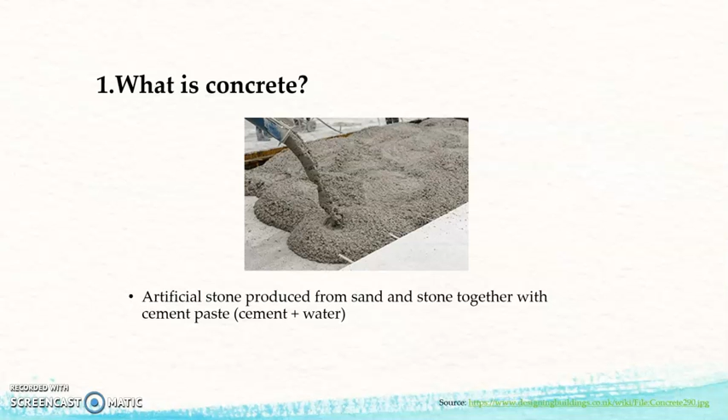First of all, what is concrete? Concrete is an artificial stone produced from sand and stone, together with cement paste, which is cement plus water. The cement paste fills the space between stone and sand particles, which then forms as the illustration on the slide. To explain in more detail, air, water, and cement form cement paste. With the addition of fine aggregate, which is sand, it then becomes mortar. Then, including the coarse aggregate, which is stone, and a little bit of admixture, it then becomes concrete.

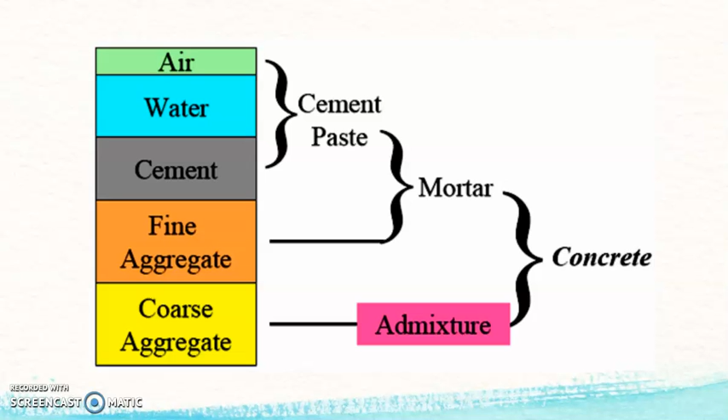These are the ingredients of modern concrete: binder materials, aggregates, water, admixtures and fiber. For the binder materials, it includes examples such as Portland cements and cement plus supplementary cementitious materials, SCM. For the aggregates, it includes both the fine and coarse aggregates. Particles below 5 mm in diameter are classified as fine aggregates. Particles larger than 5 mm in diameter are coarse aggregates.

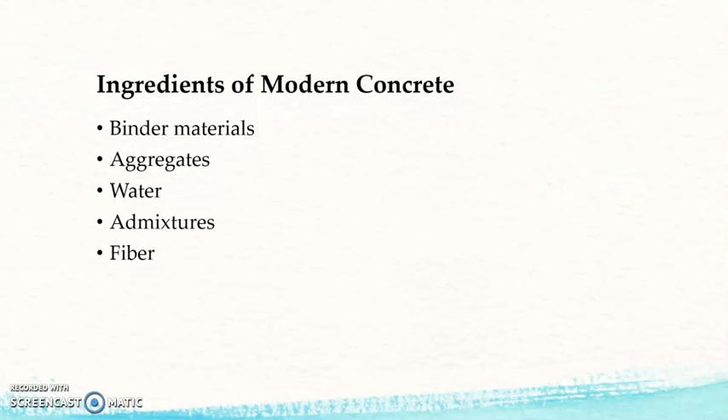Moving to the concrete applications. These are just some of the examples of concrete in our daily lives. Concrete is really widely seen and widely used in our daily lives. It can be seen in residential and commercial buildings, bridges, flyovers, culverts, dams, tunnels, water tanks, even swimming pools. Also roads, runways, pipes. Moreover, foundations, piles, and sewers.

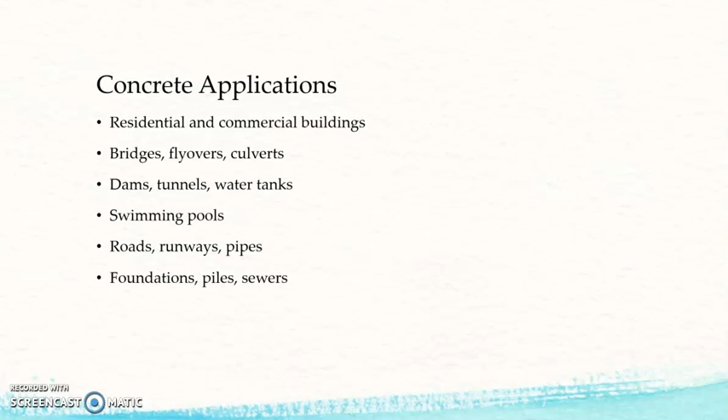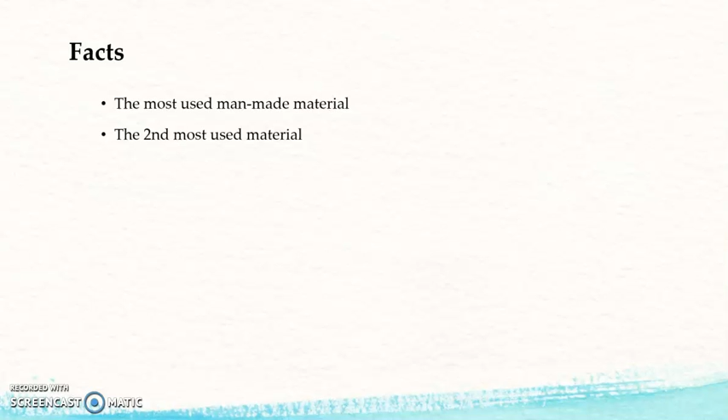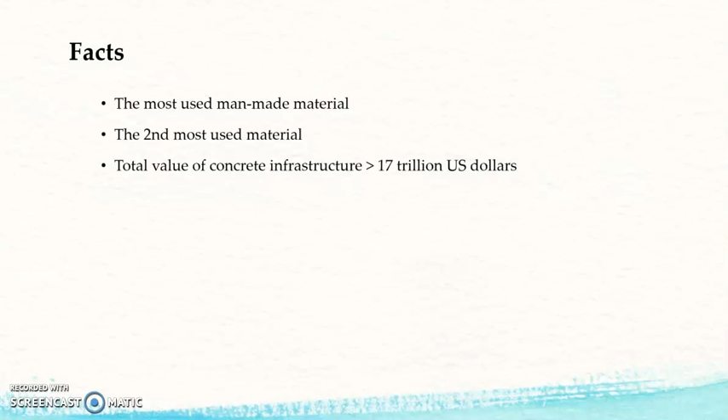Giving some facts. Concrete is the most used man-made material on Earth, and it is the second most used material. The first most used material is water. The total value of concrete infrastructure sums up to $17 trillion. The annual consumption of concrete in the world is 18 billion tons per year as of year 2006. It is about 3 tons per person, and this is more than 10 times that of steel.

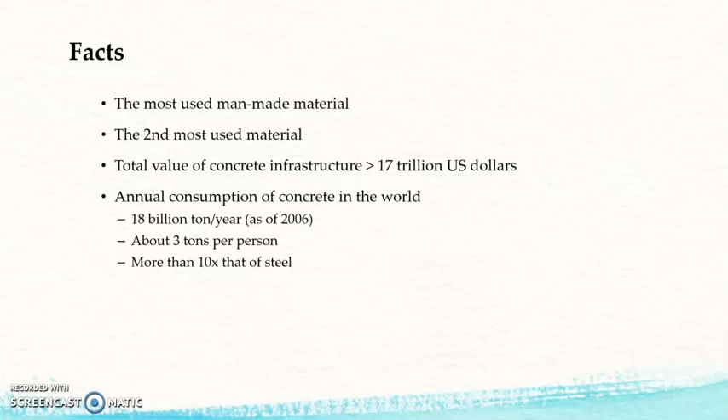So why is concrete the most used man-made material? Let's give some advantages. The advantages of concrete include the ease of production from local material and experience, so it is really cost beneficial. Also, the moldability to achieve any shape and size. So by using concrete, you can have any shape or any size in the interest of the construction site.

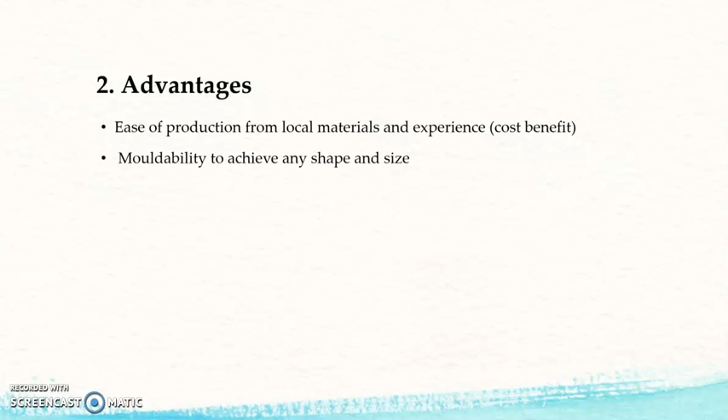It is a durable material in principle. Also, it is an excellent material for fire resistance. It is far more fire resistant than wood and other construction materials. At the same time, it requires less energy to produce than other construction materials.

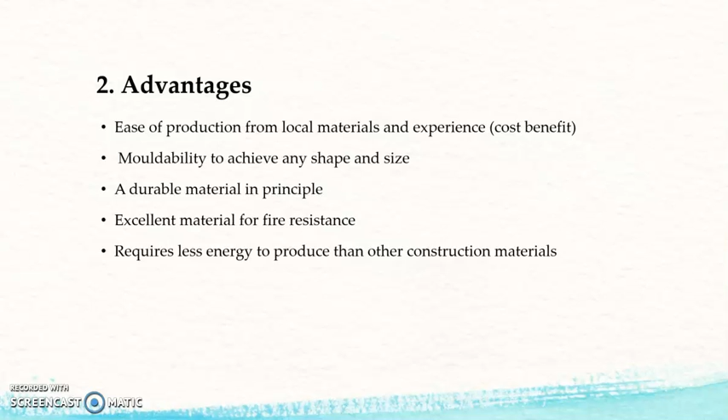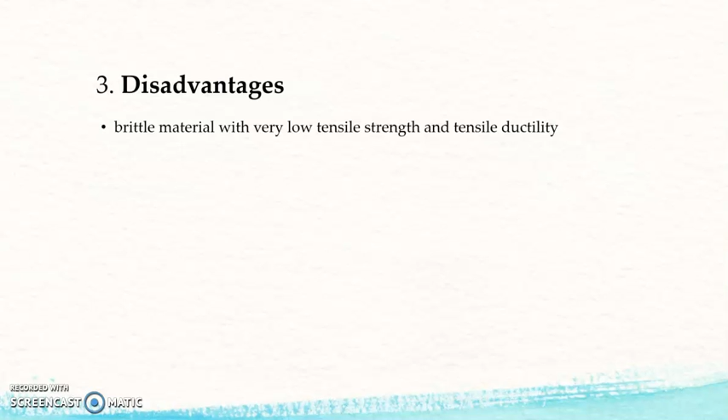Moving to the disadvantages. Concrete is a brittle material with very low tensile strength and tensile ductility. It should not be loaded or designed in tension. Even in compression, concrete has a relatively low strength to weight ratio. That is, concrete requires a large mass to achieve high load capacity.

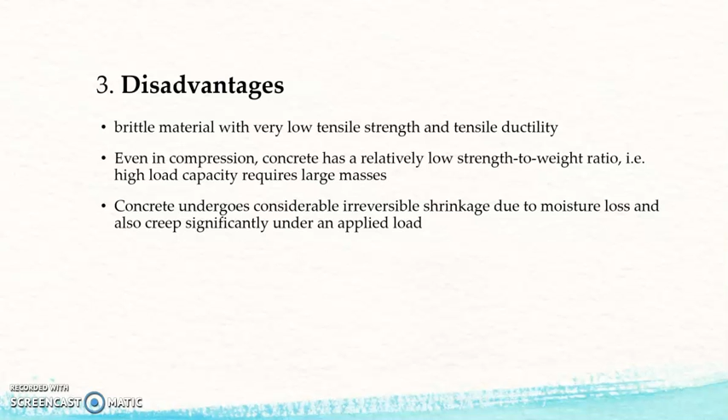Moreover, concrete undergoes considerable irreversible shrinkage due to moisture loss, and also it creeps significantly under an applied load. To sum it up, it has advantages such as the ability to be cast, economical, durable, fire resistant, and energy efficient. The disadvantages include the low tensile strength, the low ductility, volume instability, and the low strength to weight ratio. So designers have a trade-off between advantages and disadvantages when choosing concrete for their sites.

Moving to the environmental impact of concrete. First of all, enormous raw material and energy consumption. The global concrete demand is more than 18 billion tons annually as of year 2006. At the same time, 1 ton of cement clinker requires 1.7 tons of non-fuel raw material. So cement production is actually 10 times more energy intensive than the general economy, as it accounts for 2% of global primary energy use.

CO2 emission and climate change. Production of 1 ton of concrete generates an equal amount of greenhouse gases. That is, 1 ton of concrete brings 1 ton of greenhouse gases. Cement production accounts for 5 to 10% of global CO2 emission. Also, concrete can easily trap heat, causing urban heat islands. So concrete is a large contributor to climate change.

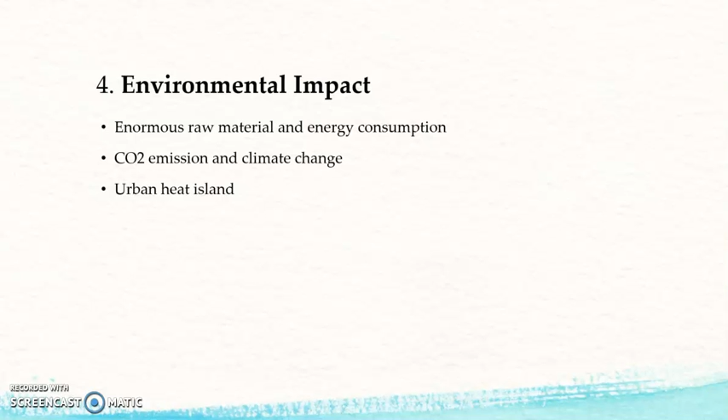All of these environmental impacts bring incentives to researchers to develop sustainable concrete. Improvement and optimization of structures have to be made for sustainable concrete. It optimizes the material to create less CO2 emission. At the same time, recycling and waste management for a more sustainable concrete use and a more sustainable environment. Innovation in materials and process ensures that concrete continues to develop to be more sustainable and more environmentally friendly.

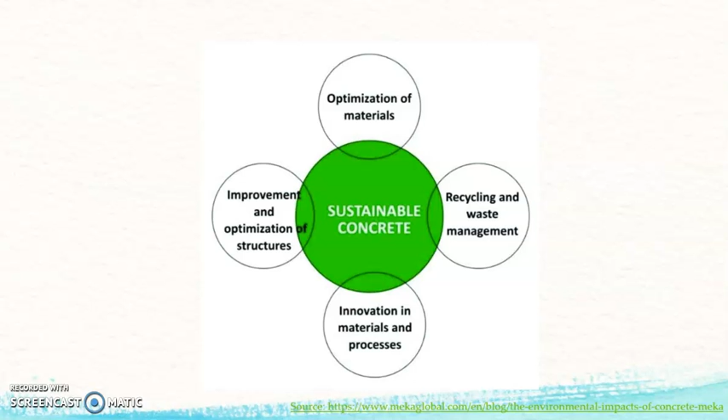In conclusion, I've explained the concrete facts and the usage of concrete, both the advantages and disadvantages of concrete, and also the environmental impact of using concrete.